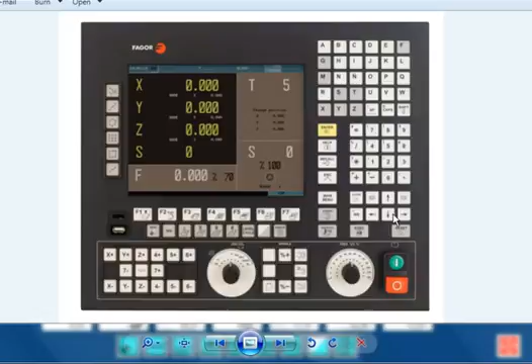In my example, I will be using my simulator software. You will be using your Fagor 8055 front panel with your Enter key, Escape key, up and down arrow keys, and the F3 key to launch the profile editor.

Let's take a look at a blueprint. Here we have a sample blueprint where we want to do two different profiles. We have a part held inside a vise, and we want to mill an end radius on the left side and also an end radius on the right side of the part. We have our part zero here, and we know where the center of the radius is for both of them.

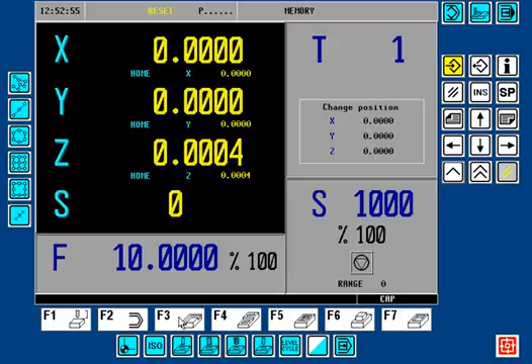Let's take a look at how this project will come together now. To begin, we'll press the F3 key. This is where the beginning of the profile cut will start. In our part example, it'll be at 1 inch, -2, plus we have to give some allowance for the cutter. We'll go down 0.75, so it'll be -2.75.

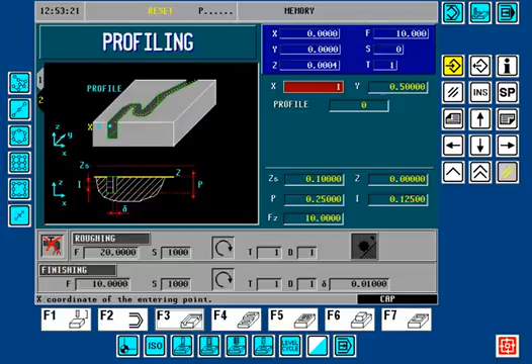1 inch, -2.75, and now we're up to the profile number. Currently, if we look in the library by pressing the down arrow key and we arrow down, you can see that 17 is the last profile created, so we'll start with 18. We'll press the recall key. Of course, yours is on your front panel labeled recall.

Very first thing I'm going to do is press the Enter key, profile, and here's my Cartesian initial starting point. That's going to be the same as where we previously plotted it in the cycle, so again that's going to be at 1 inch and -2.75. And here's our preview in purple. Let's validate that. So here's our beginning point.

We're going to want to do a straight line up to this beginning point of the arc, go clockwise around the arc, and then also come off with an exit line. So we're going to do a line, F1. We're going to go to X2, remains the same. Y2 is going to go to -2 inches. And I'm going to be traveling at a 90-degree angle.

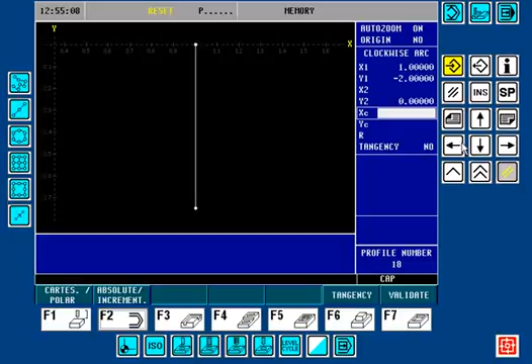Here's the preview of the line. I'm going to validate it. We now want to do a clockwise arc. Again, X2 remains the same, but Y2 goes to 0. The center of the arc is at 1 inch, Y -1 inch. And here the profile editor already has enough information to complete this step.

Validate. Again, a straight line with the F1. X2 remains the same, Y2 is going to go to +0.75, and we're going to be traveling at a 90-degree angle on the line. Again, our preview and validate. The first profile is now complete.

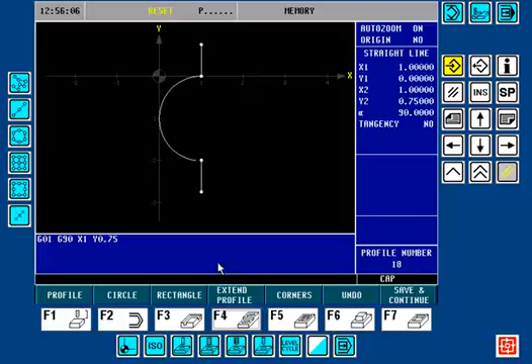You'll see that we have another button called Extend Profile. If we press F4, we're actually breaking this profile. Now we're going to go and draw the next profile. So the beginning of the next profile, let's look at our blueprint, is at 9 inches. So we're going to go to 9 inches and +0.75.

There's the preview. Validate. We're going to do a straight line. X2 remains the same, Y2 moves to 0. And this time we're traveling at a -90-degree angle. Validate. Again, we're going to do a clockwise arc.

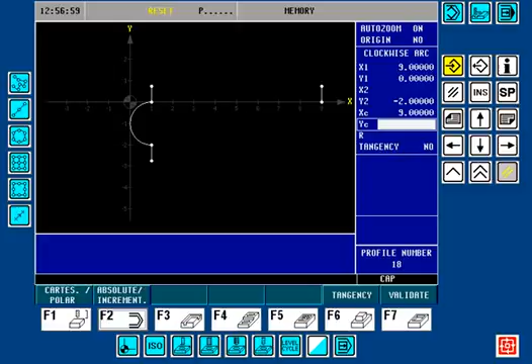X2 remains the same, Y2 goes to -2. X center is at 9, Y center is at -1. And again, it has enough information to solve it at this point. Validate.

Another straight line exiting off of this profile. X2 remains the same, Y2 goes to minus 2.75. And again, minus 90-degree angle on the line. And validate. Okay, if you remember from lesson number 3, we talked about how to change these linear lead-on and lead-offs to an entry tangential and an exit tangential.

So we'll press the escape key twice. We'll go to the modify key, and we're going to go to corners, F5, and we're going to choose tangential entry. But now, because we have more than one profile, we get some new soft keys that pop up that weren't shown previously to go to the previous profile or the next profile.

So we're going to go to the previous profile, and here is the entry point of the first profile. The radius, I'm going to choose 0.5, and here we have our tangential entry. Now we're going to do the exit, and it automatically selected it on the same profile. 0.5. Okay, now we're going to do tangential entry, but again, we now need to go to the next profile.

Here is the tangential entry of this profile, and we'll type in 0.5, and the exit, 0.5. This project is complete.

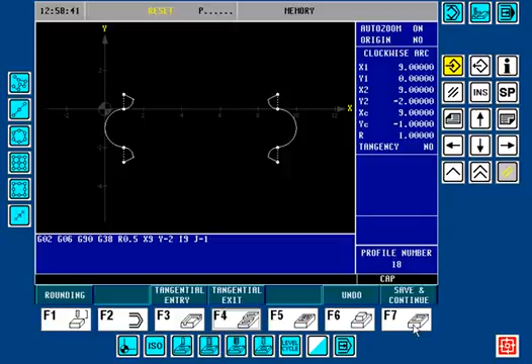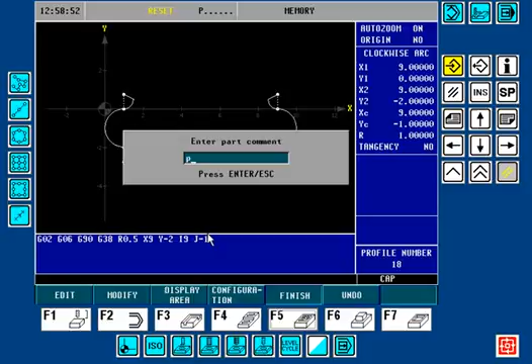Let's save and continue. We'll press the escape key twice. We'll finish it, and we'll name this project. We'll call this Profile 1. Enter. Okay, so we have profile number 18.

Okay, we already have all our values all set from previous projects, and we have left side cutter comp. I'm going to press the graphics icon key on my keyboard.

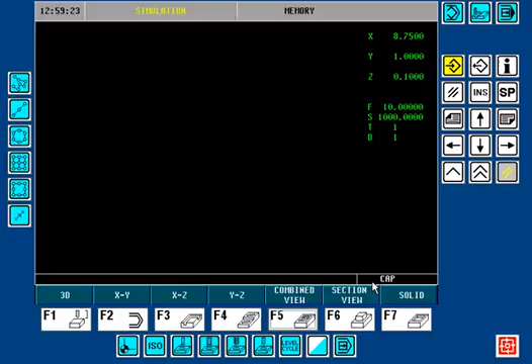Type of graphics: XY, clear the screen, cycle start, display, and optimize. Okay, here we have profile number 1.

And then it leads over to profile number 2. But we have a problem: there's a continual cutting line that joins profile number 1 and profile number 2 together, but we don't remember drawing that in the profile editor.

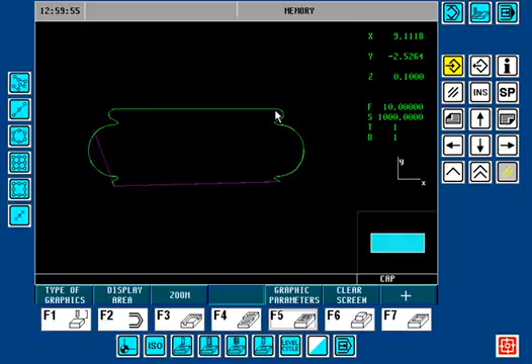Let's escape out of here, go back to the profile, and press the recall key. You'll see that the Fagor profile editor, when performing a profile, automatically joined the profiles together with a continual cutting line.

Now, if we look at our example, you can see that's not going to work for us. If we lead on, cut around, lead off, come up to about here, we're going to wind up cutting straight across the vise because Z is going to remain at depth if it's a continual cutting line.

And then we're going to cut around this profile. So the problem that we have is that Z remains at depth when it goes to the second profile.

Sure, I could have made the exit line longer and we could go around the vise, but really that's a waste because this is going to be traveling at cutting feed rate, very slowly, as if it were cutting material traveling over to the second profile. So this creates a problem that we must overcome.

So even though the profile editor allows us to draw multiple profiles, you have to take into consideration that they must all be joined together at the same cutting depth. You may draw as many profiles as you like, but they all must share the same depth. There will not be any Z retract when going to the next profile.

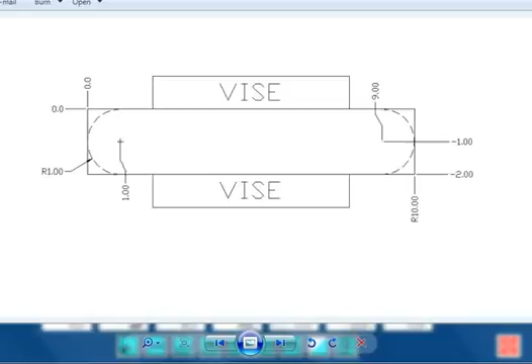So the solution to this is to eliminate this profile and the joining line that chained them together. We're going to leave just profile number 1, and then create a program that cuts two different profiles, or two different events, back to back.

So what I'm going to do is go to Modify, delete an element, and go to previous, and it highlights the very last entity in the chain. I'm going to press the enter key, and it's going to delete that.

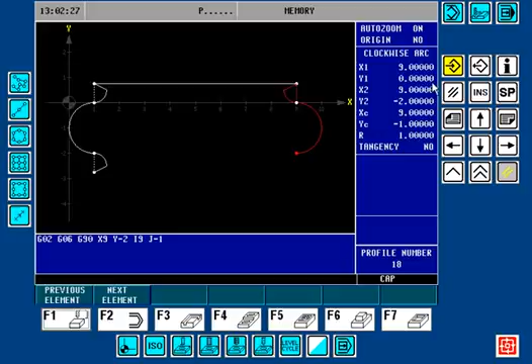I'm going to delete another element, again previous, enter. Delete another element, previous, enter. Delete another element, previous, enter.

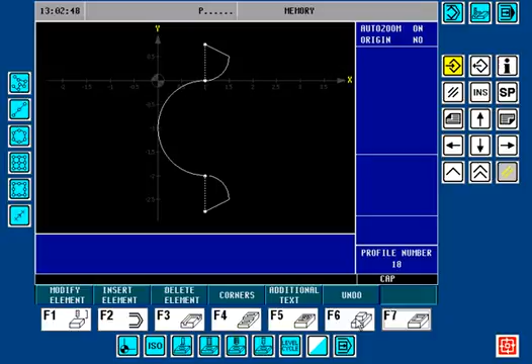Okay, so now we only have profile number 1. Save and continue. Exit twice. Finish. Save it to profile 18.

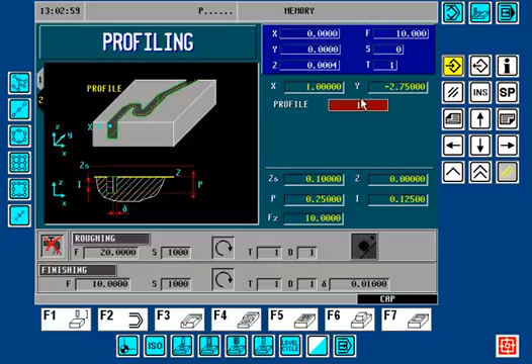Enter. Okay, so now when we go to the graphics icon key, clear the screen, we only cut one profile, then Z retracts clear of the part.

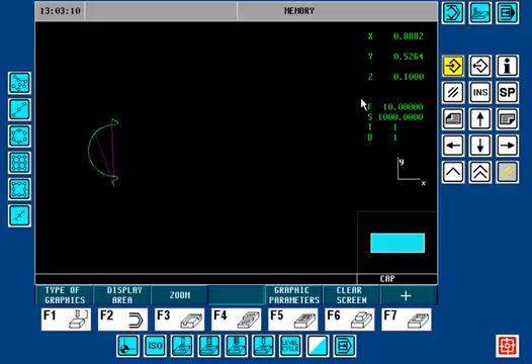Now we're going to create profile number 19, and we're going to press the recall key, and now we're going to create the second profile as a separate profile. So, profile.

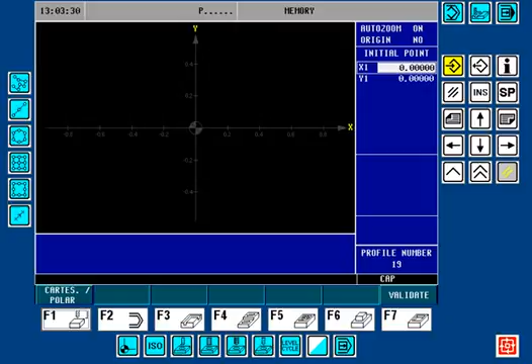Cartesian point, and again, if you remember, we're drawing this profile at the 9-inch location. So the initial point will be X equals 9, positive 0.75.

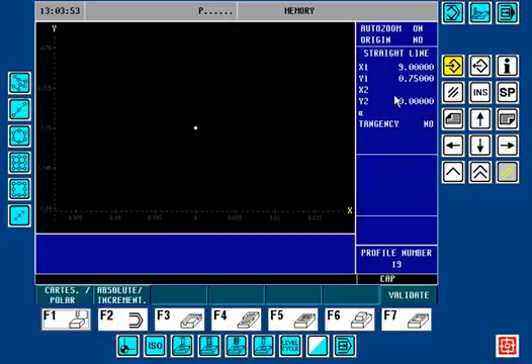Validate. We're going to do a line. X2 remains the same, Y goes to 0, traveling at a minus 90 degree angle. Validate. A clockwise arc: X2 remains the same, Y2 goes to minus 2.

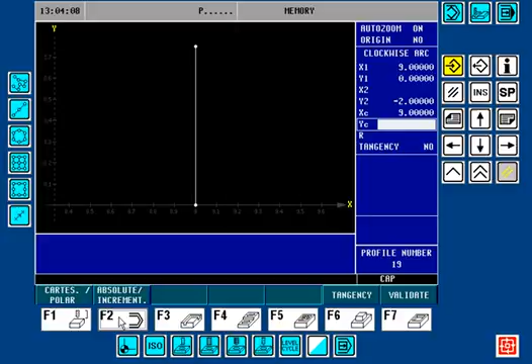X center is at 9 and minus 1. It already has enough information to solve it, no need to enter the radius.

And then another straight line: X2 remains the same, Y2 goes to minus 2.75 at an angle of minus 90 degrees, and validate it.

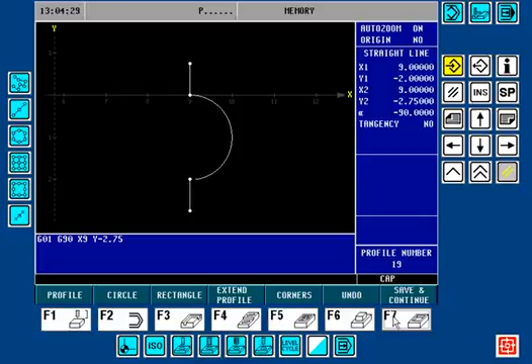Again, we're going to escape twice to get to the modify key. We're going to choose corners, tangential entry. This is the correct point, 0.5, and the tangential exit. That is also going to be 0.5.

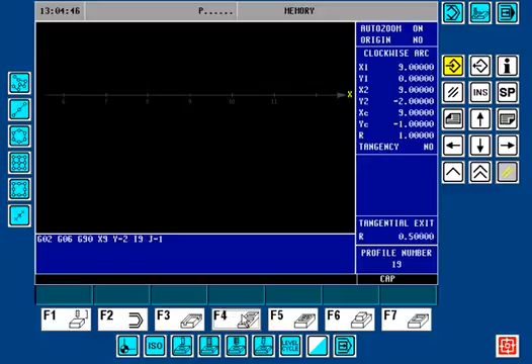Okay, this profile is complete. Save and continue. Escape twice. Finish. And we'll name this one Profile 2.

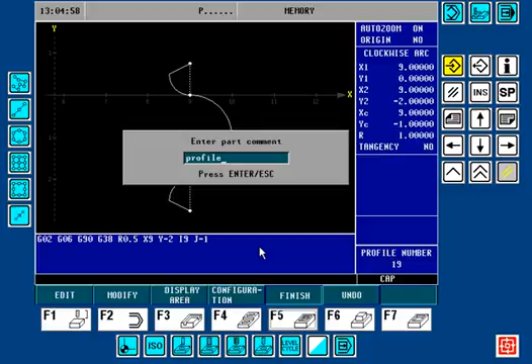Now the next step is that we must go into our part program by pressing the P.program key, and we need to save both of these profiles, or basically two events, separately. I'm going to press the down arrow key, and choose profile number 1 to begin with, then press my part program key.

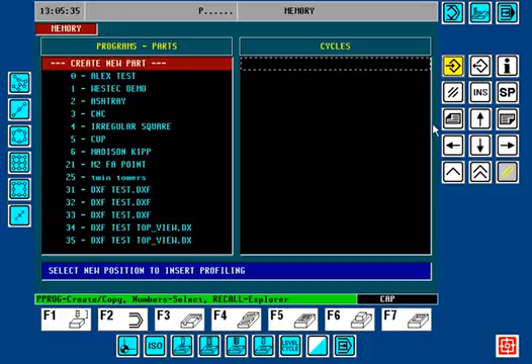I'm going to create a new part by pressing enter. Okay, part program number 7 is the next program available.

Profile 1-2. So this will include both profiles. I'll press the enter key and enter in profile. This will be the first profile.

I'll press the escape key. I'm going to arrow up, then arrow down, expand the library, choose profile number 2, enter.

Okay, after we load profile number 19, we now also have to change the starting point. So I'm going to arrow up, and this X now becomes 9 inches, and the Y becomes positive 0.75.

Now I'm going to go to my part program and enter in the next step. So again, this is profiling with the first profile, number 1, and this is profiling with the second profile.

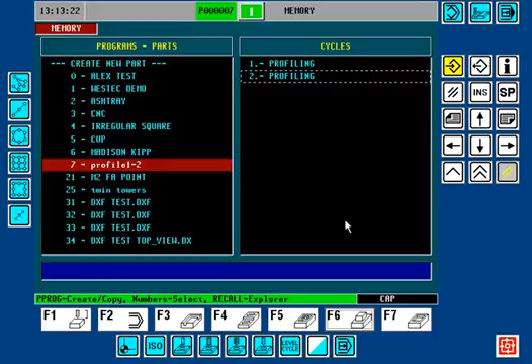A little arrow to the left will highlight the part program to run complete steps 1 and 2. Now we'll go to the graphics simulator, clear the screen, press cycle start, display area optimized. And now we have our completed part.

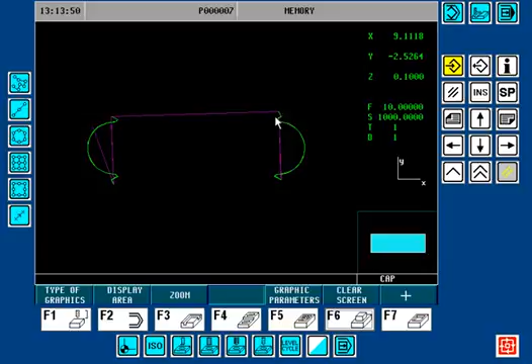Now you'll see the difference where we lead onto the part, cut the radius, Z retracts, then becomes a rapid movement across the vise to the next entry point on part profile number 2. Z moves to depth, cuts around the part, Z retracts. This completes lesson number 6.